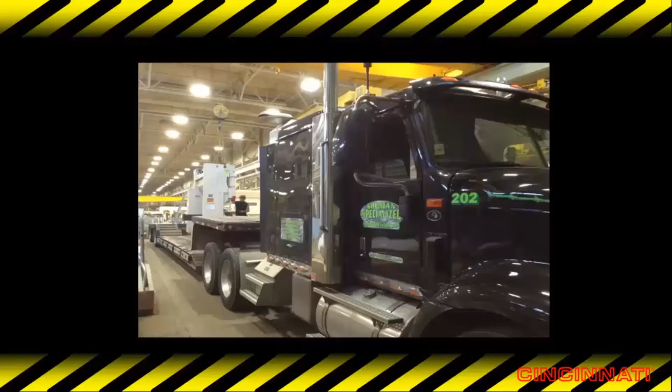To look at just one segment, restaurant and food processing equipment, we can see grills, refrigerators, dishwashers, shelving, counters, range hoods, warmers, ovens, and fryers are everywhere.

A press brake operator should always be aware of the tremendous forces involved in press brake metalworking. Naturally, specific safety rules must be observed when using a machine which can bend metal with forces greater than the force required to crush a car. Permanently disabling injury can occur when a press brake operator does not pay close attention to the job he or she is doing.

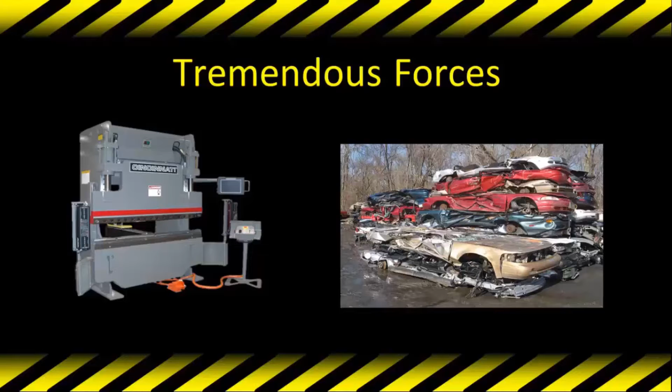Whenever you combine a human with a machine, safety becomes an issue, especially where you have large forces like are used to form or punch metal with a press brake. Applicable standards and safety codes. American National Standards Institute, ANSI, a private nonprofit organization that oversees the development of voluntary consensus standards for products.

ANSI B11.3 Safety Requirements for the Construction, Care, and Use of Power Press Brakes is a voluntary standard that provides safety guidelines for manufacturers of press brakes, employers, owners, and users. OSHA is a federal agency that enforces safety in the workplace.

OSHA requires employers to safeguard the point of operation per Subpart O, Section 1910.212 of the Occupational Safety and Health Administrative Directive. OSHA often references ANSI B11.3 for guidance.

Responsibility. Press brakes manufactured by Cincinnati Incorporated comply with the construction standards established by the American National Standards Institute and the Occupational Safety and Health Administration as of the date of manufacture. User responsibility. The user, that is the owner, is responsible for the installation and startup of the press brake.

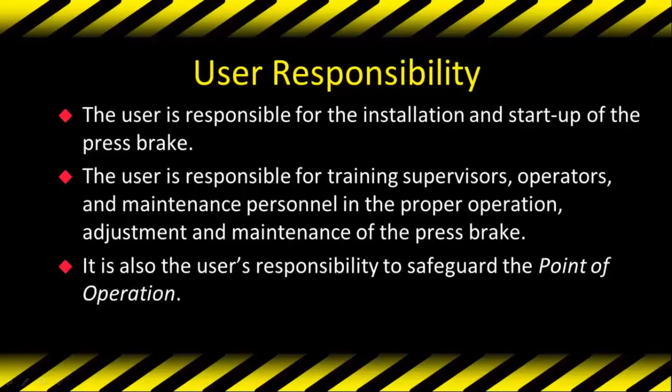Safety and warning signs indicate caution and should be read carefully. The signs may be attached directly to your machine or may be in the general work area. Obey these safety signs. Also check to make sure that the safety signs are in good condition. If a sign becomes damaged or illegible, please contact Cincinnati Incorporated for a replacement.

A sign on the machine indicates dangers involved and how important it is to read the operation, maintenance, and safety manual before operating the press brake. Do not place your hands in the die area. Do not position any part of your body where it can be struck or crushed by part movement. Always read and understand the operation, maintenance, and safety manual before installing dies, operating, or servicing a press brake.

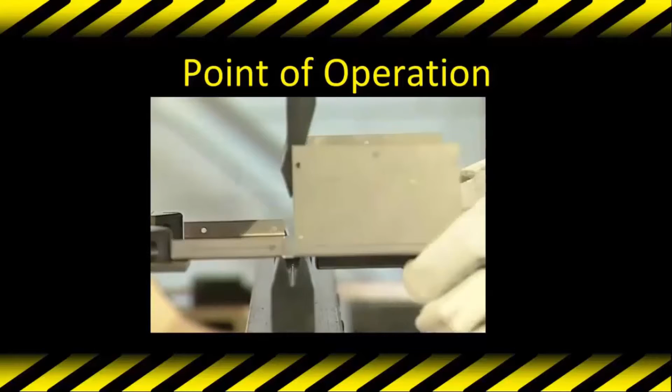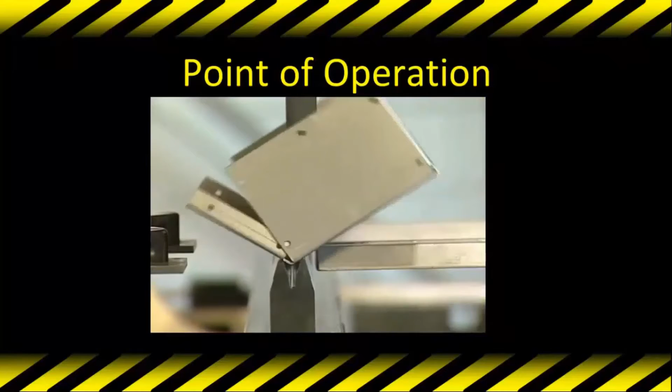The point of operation is the area between the dies where the actual forming occurs. Hands, arms, or other parts of one's body should never be placed in the point of operation. The most important press brake safety rule is never put your hands or other parts of your body between the dies, even when the press brake is stopped.

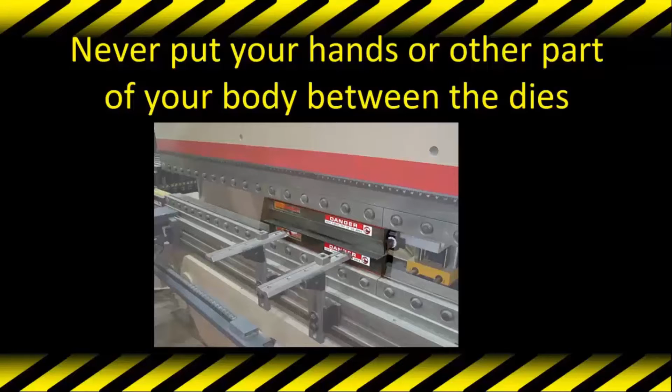Whip up is another danger most often presented when forming a large part. Smaller V-dies mean that even with a slow ram movement, the part can whip up very rapidly. Stand clear in the direction of the part movement. Select a safe forming speed. Fast forming speed that works productively on a small part may provide a significant whip-up danger on a large part.

Keep thumbs and fingers clear of part movement. Note that the faster forming speed in the first video produces significant whip-up. The second part is formed with slower forming speed.

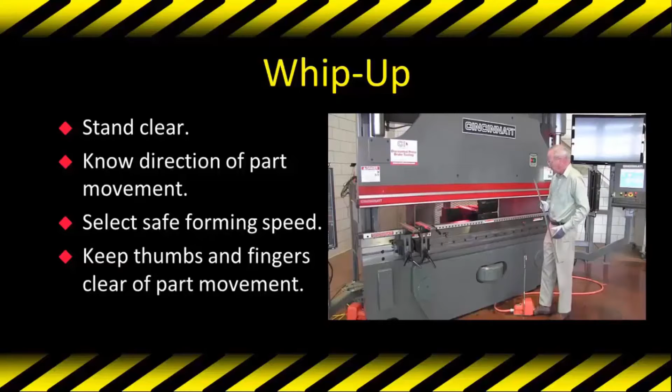The primary pinch point of the tooling is obvious. Secondary pinch points are not as obvious and provide a challenge to safely operating a press brake. The operator needs to be vigilant of part movement when it is formed. For instance, this part contacts the tooling at the end of the forming stroke.

If the operator is holding the part by the top of the flange, the hand could be pinched between the part and the tooling, resulting in serious injury. Always be aware of the direction the material will move when being formed. Then handle your material where your hands will not be in danger.

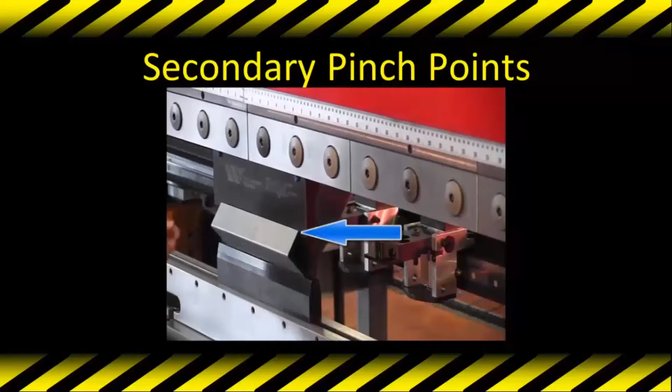Read operation and safety manuals. There are several manuals that come with each press brake. An operation and safety and maintenance manual should be kept at the machine for ready reference by the operator. Information on safeguarding and safe operation are also included.

Read the operating and safety manuals for the press brake you are using. These are available and should be in a pouch attached to the machine or nearby so that you can refer to them easily. If not, ask your supervisor. It may seem obvious, but managers and machine operators should review each publication supplied with the brake thoroughly before any setup or operation is attempted.

In addition, the safety guidelines reiterate reading and understanding the operation and safety manual. If there is some aspect of the brake that you do not understand, please feel free to contact Cincinnati. We have a team of training, tech support, and applications people available to answer your questions.

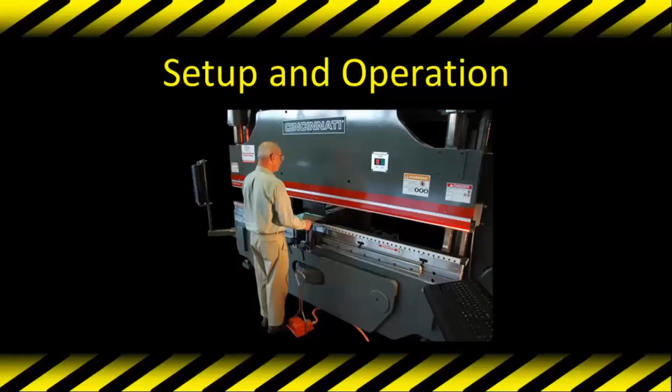Gain a full understanding of what the operator control key switches do and how to use them properly. The operator key switch is used to prevent unintended ram or gauge motion. Both operators and maintenance personnel should utilize the key switch when setting up or maintaining the machine. The key switch should be turned off, especially when making gauge adjustments or anytime someone is working behind the machine.

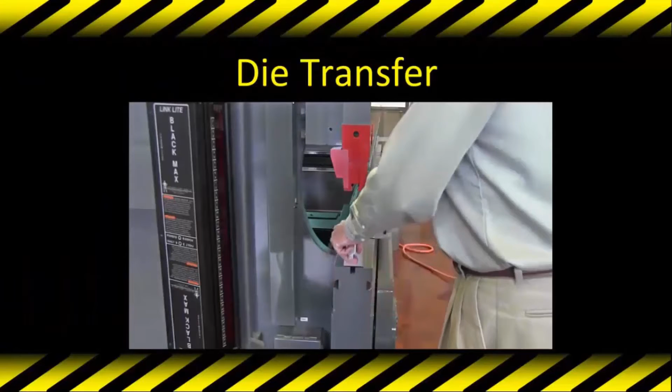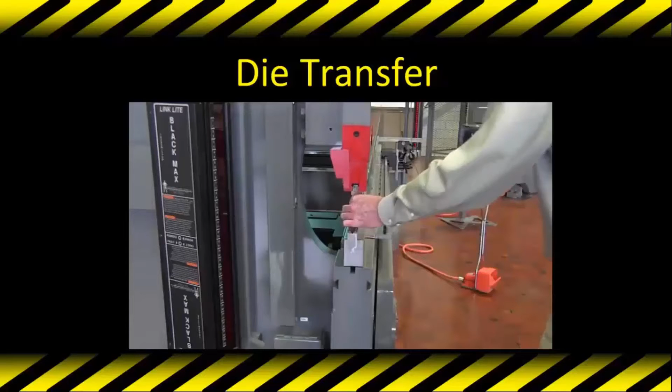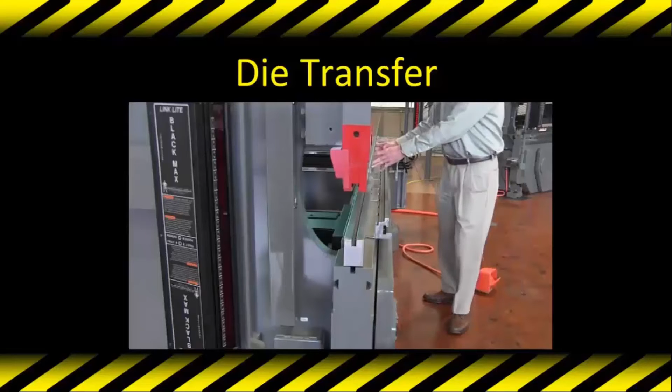Press brake setup, die selection. The first step in setting up a press brake is selection of the best dies for the particular job. Often a bend can be made by more than one set of dies, but in terms of safety and efficiency, there is always one set best suited for the job. When transferring dies to or from a press brake, know the weight of the dies. Don't assume that just because a die is small, you can carry it by hand. If you do not know the weight of the dies, or if the dies are heavy, use a hoist or other material handling device.

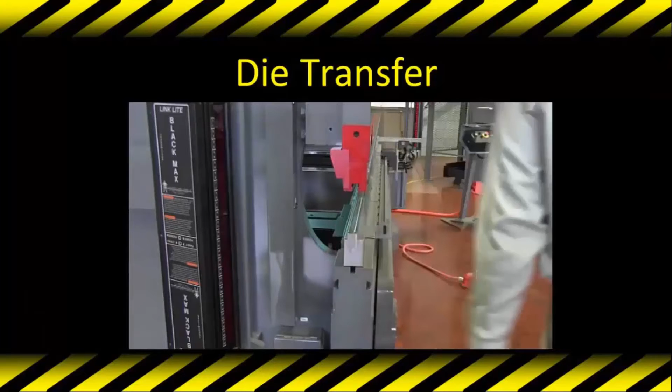The operator control key switch should be turned off to make sure the ram does not move any time tooling is being inserted or removed. The lower die should be installed first. The ram needs to be low enough to keep the upper die from falling out when it is slid in on the lower die. Under no circumstances should the operator put his hands between the dies.

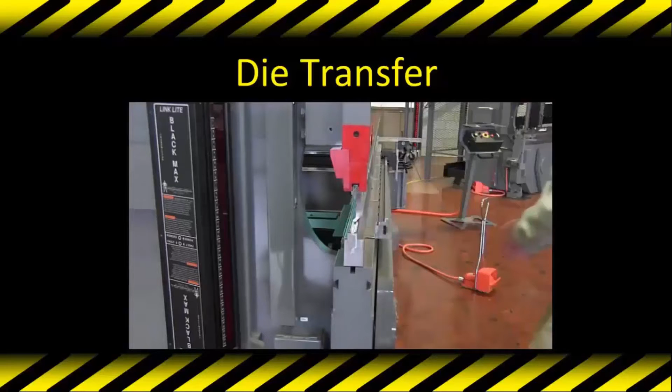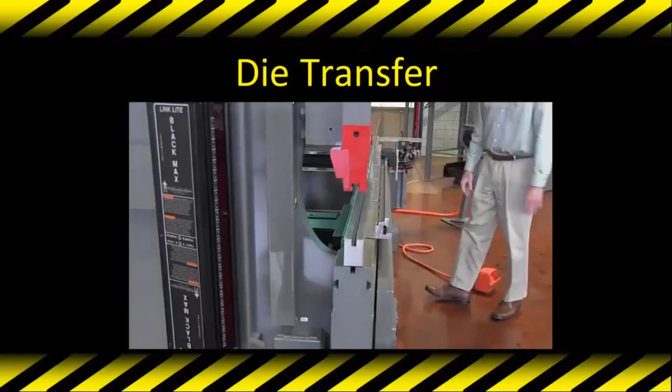When installing dies, use the palm buttons and move the ram down. Stop the ram just prior to bottoming on the lower die. Turn the operator key switch off. To remove dies, loosen the die clamps and slide the dies in or out of the ends of the press brake. When removing dies, make sure the upper die is resting on the lower die before the die clamp is loosened. For support, keep the tongue of the upper die in the nose of the ram. When moving dies, always remove the upper die first.

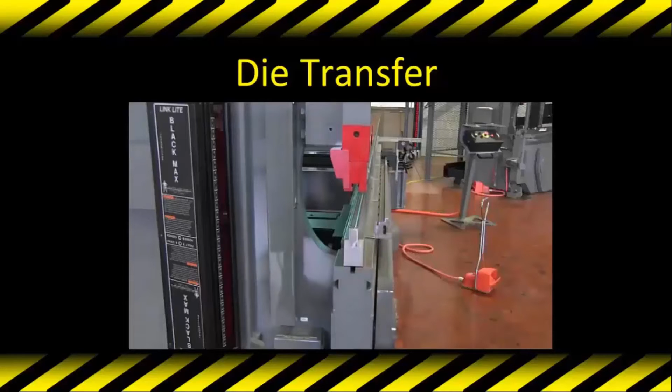On a mechanical press brake, it is recommended that the main motor be turned off and that you wait for the flywheel to stop before installing or removing dies. Next, make sure the operating control switch is off. This will prevent you or another worker from accidentally cycling the ram while setting up the dies. If a foot pedal is used to operate a press brake, make sure it is taken off the treadle bar. This is to prevent you or a coworker from accidentally activating the ram.

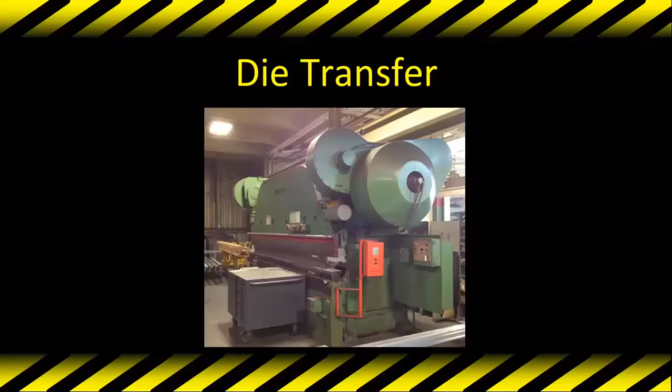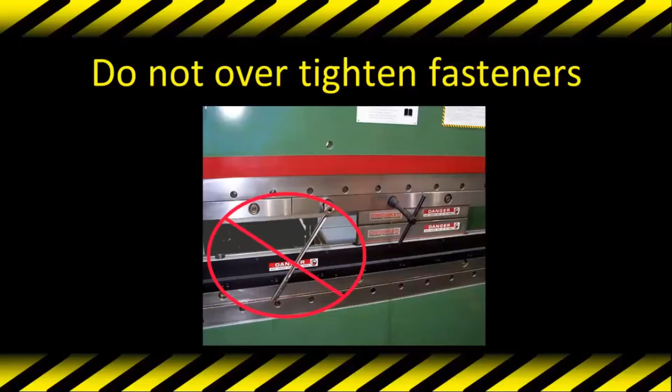Make sure all nuts, bolts, and screws are tight. Because of the forces involved, loose dies may be thrown out of the machine when it is activated, causing serious injury to you or a coworker. Do not over-tighten your fasteners. The T-wrenches that come with the machine are sufficient. Do not use breaker bars or longer wrenches.

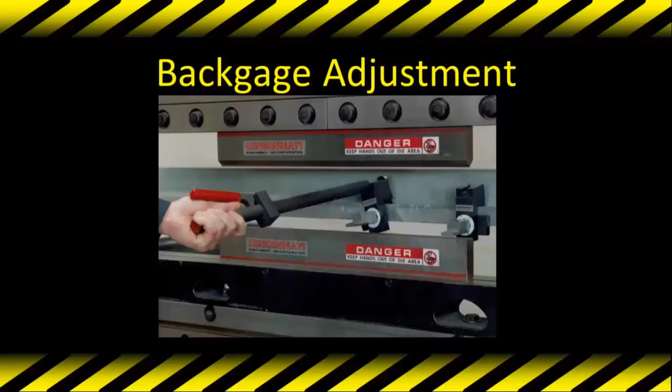Do not reach through the die space to adjust the back gauge. On some back gauges, special tools are available to adjust the back gauge without putting any part of your body in danger from either the point of operation or from the back gauge itself. Reaching through the die space is not only hazardous because of the point of operation, it is also dangerous because of back gauge positioning near the tooling. The back gauge can exert large forces that can cause severe injury between the gauge fingers and the tooling.

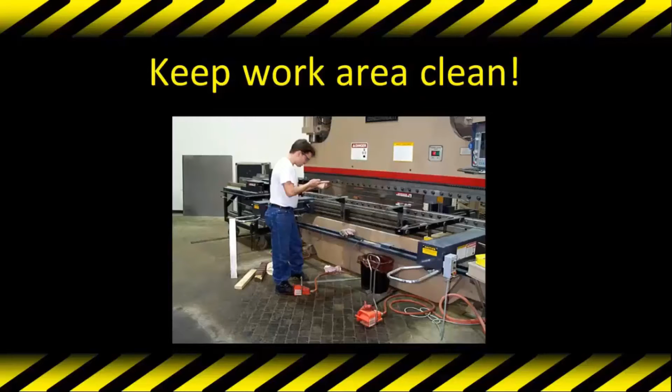Neatness is important. Keep the floor of your work area clear of scrap and trash that could cause you to stumble. Put scrap in the proper containers and keep stock and finished work neatly arranged. Be sure slippery surfaces are cleaned up properly. Stumbling and slipping can result in injuries as well.

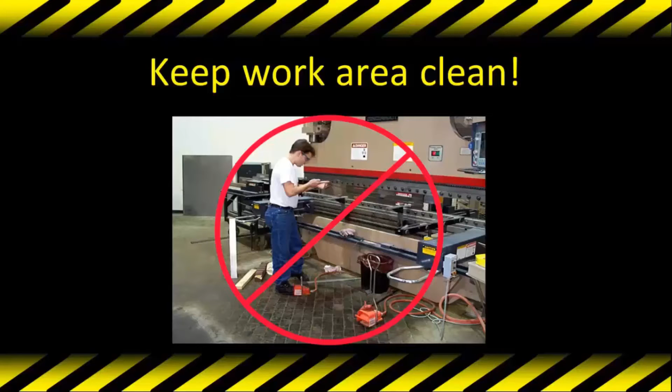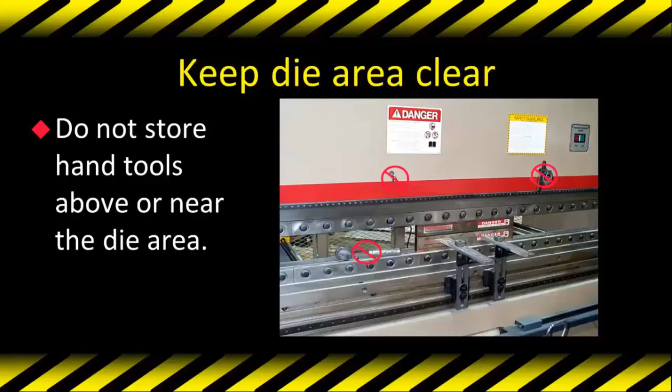Keep the die area clear. Put away all tools and equipment that are not in use. Tools left in the path of the dies may be shattered by the force of the press brake. Pieces hurled from the machine can cause severe injury and damage. When not in use, tools should be stored in a toolbox or on a wall rack. Hand tools should never be hung on the ram. Even a screwdriver can be deadly if left on the press brake or lower die.

Safeguarding. It is the user's responsibility to safeguard the point of operation of a press brake. The press brake manufacturer cannot determine all the possible uses of the machine tool they have produced. The user must, therefore, apply the proper type of safeguarding for the jobs that are being performed on the press brake.

Safeguarding selection process. Analyze the part before setup. Type and thickness of metal. Angle and radius of your bends. Length and location of flanges. Select the right dies for the job.

Is another type of machine better suited to perform this operation? Select the proper press brake. Examine tonnage, stroke, back gauge, and will it accommodate the part? We want to check the weight of the part to make sure that it can be safely handled. Can the material be safely handled?

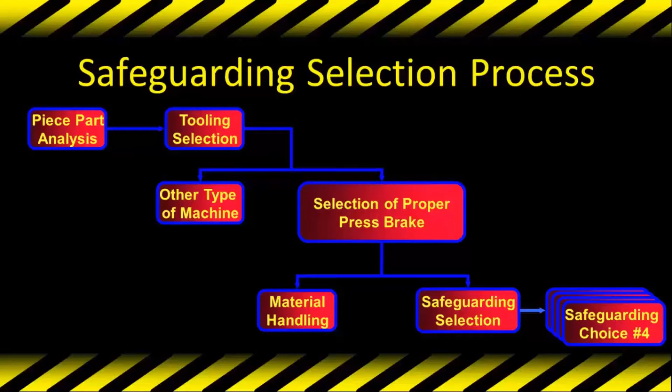We want to check the part for secondary pinch point conditions. What is the best safeguarding to use for the part using the selected tooling, handling, and forming sequence? There is no universal form of safeguarding that will work for all parts on all press brakes.

Point of operation safeguarding can be one or a combination of devices, guards, and methods including presence sensing, dual palm buttons, hand-foot sequence, restraints or pullbacks, safe distance, partial barriers, fixed guards, and safe opening.

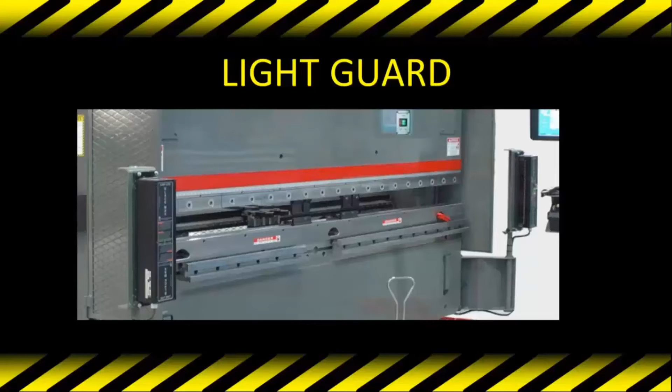Presence sensing devices. A light guard is a common presence sensing device that is used to safeguard the point of operation of a press brake. The light curtain spans the front of the point of operation and prevents press brake movement when the light curtain is interrupted.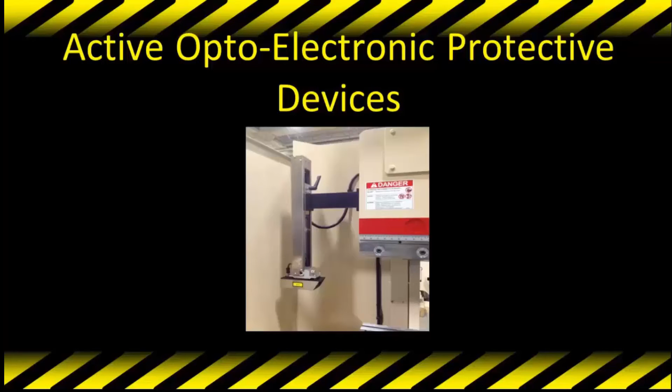Another form of safeguarding is active optoelectronic protective devices, sometimes referred to as a laser guard. They provide a protection zone just below, behind, and in front of the tip of the upper die. Dual palm buttons assure that both hands are away from the point of operation.

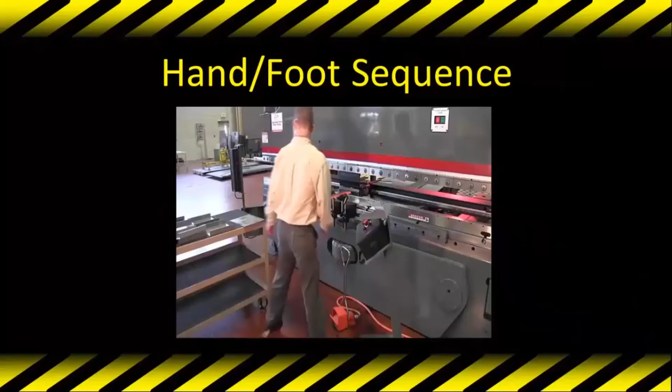The hand-foot sequence. Often, an operator can use palm buttons and a foot switch to provide safeguarding. The operator brings the ram down to a safe height with the palm buttons, then positions the part against the back gauge and cycles the machine using the foot switch.

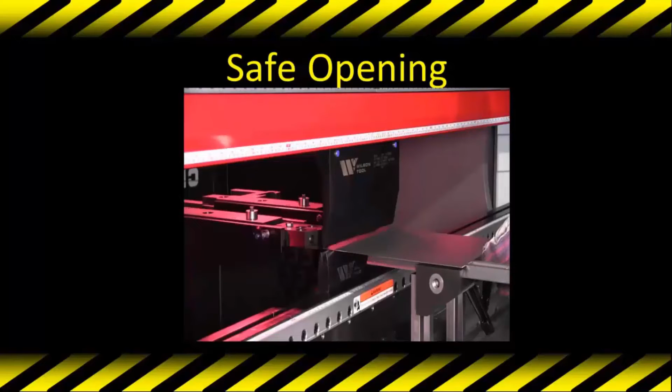Safe opening. Limiting the opening in the point of operation to no more than 1/4 of an inch or 6 millimeters may provide adequate safeguarding.

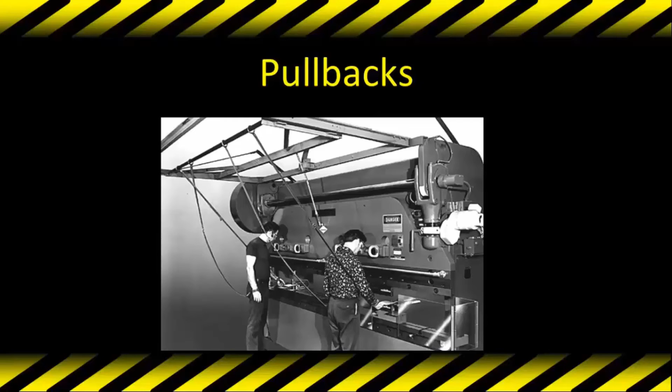Pullbacks are one of the original safety devices employed on brakes. They physically pull the operator's hands out of the way of the point of operation when the press brake cycles. These are more common on mechanical press brakes. Similar to pullbacks are restraints. They simply limit the motion of the operator to make sure they cannot reach the point of operation of the machine.

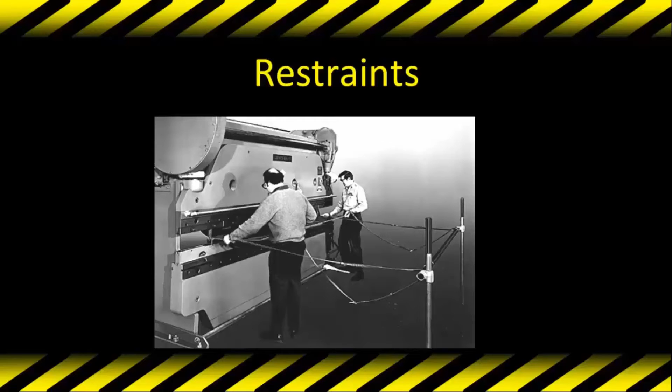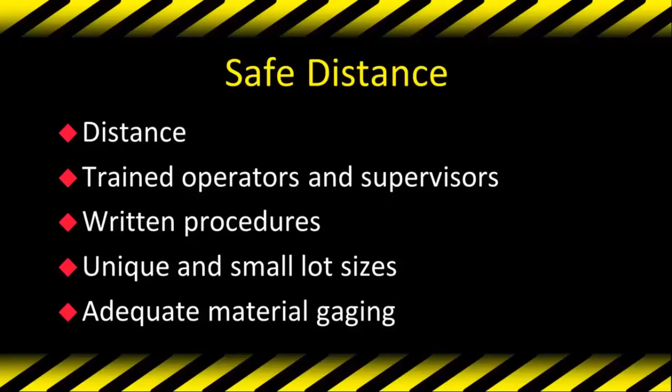Safe distance is a safeguarding method that involves participation of the supervisor, trained operators, and special instructions. This method is only used when safeguards and safety devices are not feasible. A safe distance from point of operation is determined by trained operators and supervisors. This method should only be used after thorough understanding of ANSI and OSHA requirements for safe distance safeguarding.

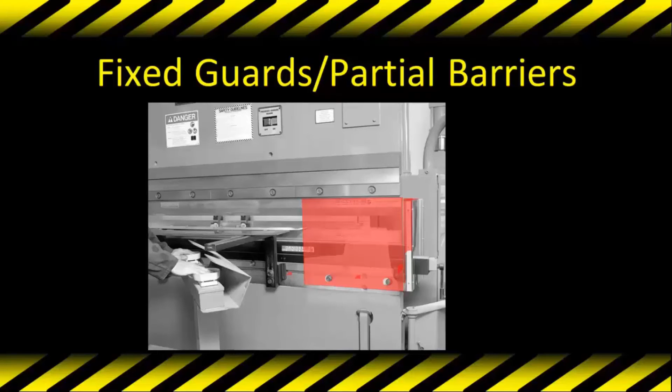Fixed guards and partial barriers. Unused portions of the tooling can be safeguarded when there are areas of the tool where the material is not being formed and the gap may be large enough to cause harm. End guards can be used to supplement other devices to limit access to the ends of the die space. End guards can be fixed or hinged. They may or may not be interlocked with the machine control.

Awareness barriers provide indication of areas where injury can occur. Make sure to follow proper procedures if you need to access the area guarded with an awareness barrier. Some press brakes have a fence and an interlock gate to prevent entry into the rear of the machine.

Safety devices, guards, and methods are no substitute for proper operator safety training by management, following recommended machine builder safety practices, good machine maintenance and repair programs, or most importantly, a safety-minded employee.

It is important the user specify protective gear that must be worn at all times when in their shop. Safety glasses and safety shoes should always be worn in a fab shop. Wear snug-fitting hand and arm protection when handling rough or sharp-edged stock.

While the machine itself can pose dangers, the simple handling of material in a fab shop poses its own set of dangers. Sheet metal can have sharp edges. Metal parts can be awkward to handle. Recently cut plate parts can be hot. Parts can be heavy.

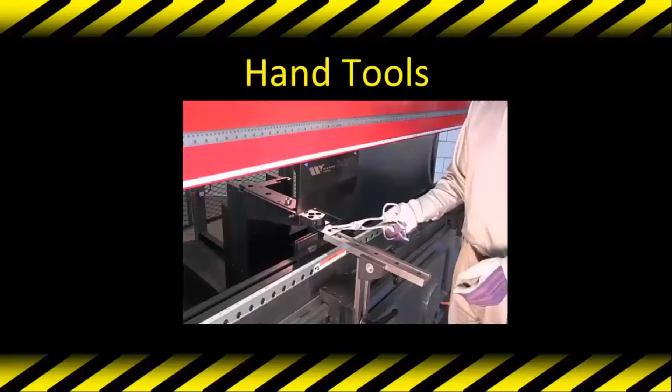Another way to keep hands away from the point of operation when placing and removing small parts is to employ hand tools like these aluminum tongs. Only soft tools should be used near the die area to help prevent the possibility of injury should a hand tool be left in the die area.

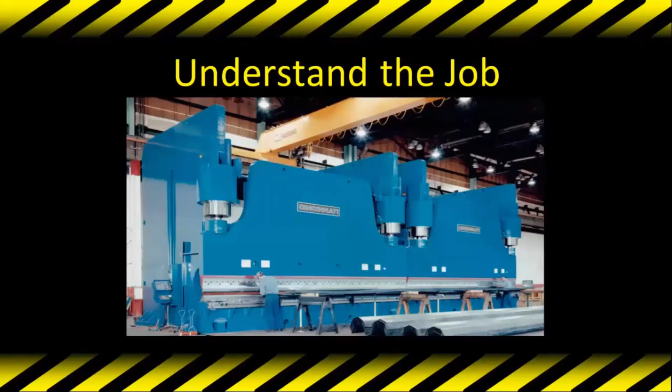Understand the job. If you are working with another person, be sure you both understand the job to be done. Go over the job step by step so each of you understands what the other is doing.

Note that these two operators are forming a larger part. The part cannot be formed until they both activate their respective foot controls, or palm buttons, if that's the case. This assures that both operators are ready to form the part safely. More importantly, either operator can stop the motion of the press brake simply by releasing the foot switch.

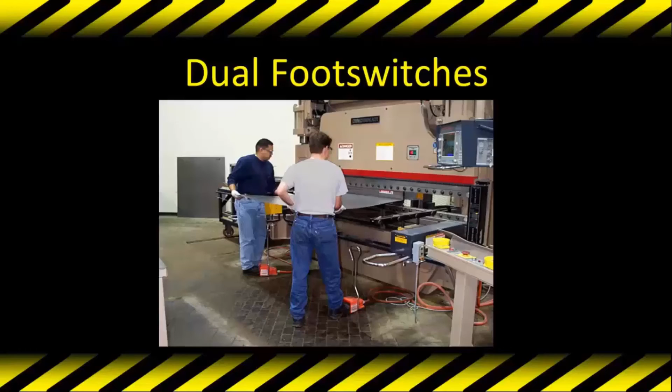Use a maintenance checklist to be sure the press brake is in proper working condition at the beginning of each shift. Safeguarding at the point of operation is in proper adjustment and operating properly. Pinch point guarding is properly installed. Operator controls are functioning properly. Operating modes are working okay. Ram starting and stopping properly, especially on an older style mechanical press brake.

Warning plates should be clean and easily read. Electrical wiring in good condition. Caution painting in good condition. Auxiliary equipment like cranes, scissors tables are checked or working properly. Hand tools are in good order and readily available. Personal protective equipment, make sure yours is in good shape and you and the people around you are wearing appropriate equipment for the job.

Concerning your manuals, the operation, safety, and maintenance manuals are attached to the machine and you are familiar with their contents. And that scheduled normal maintenance work has been completed. Only then should you start to do work on the machine.

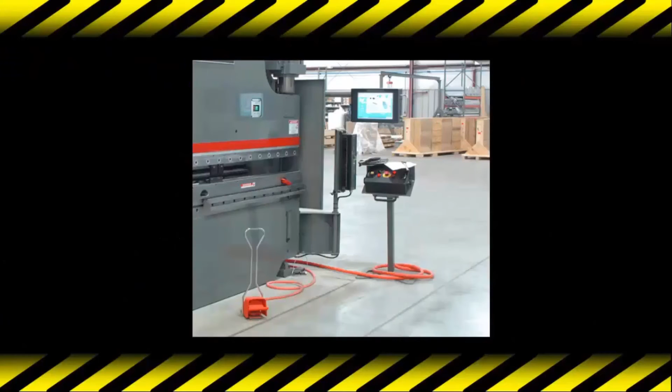The controls and wiring should be checked to be sure they are not damaged. Damaged wires or electrical boxes may short out a safety device or operator control, preventing it from working properly. All safety devices on the press brake should be checked to be sure they are operating correctly. Report to your supervisor any needed repair or safety hazard that you are not authorized to fix yourself. Do not operate the machine until it is repaired.

Before each use of the press brake, a thorough check of the neatness and maintenance of the press brake is important to ensure your safety and the safety of your co-workers. Use a maintenance checklist to be sure the press brake is in proper working condition at the beginning of each shift.

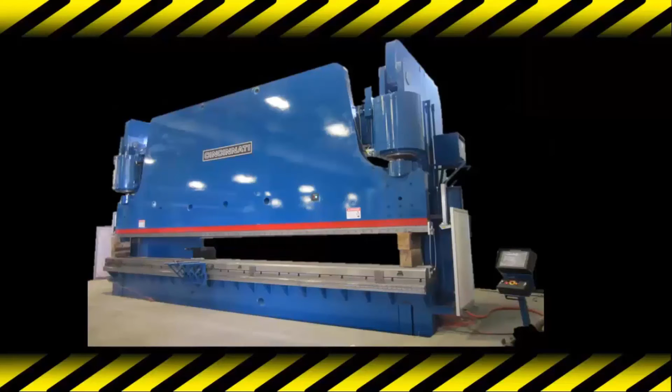Review of press brake operation. When operating or helping on a press brake, you must pay close attention to the job you are doing. Talking, joking, lack of attention, or leaning on machinery while the press brake is in operation can result in serious injury to you or other employees. You should know how your particular press brake operates and understand the specific job you are doing and its safety requirements. If you have any questions regarding safe operation of your press brake, ask your supervisor.

At the beginning of each shift, or after you've been away from the press brake for a while, run the machine through several strokes without any material in it to make sure everything is operating correctly. Use special safety hooks or small hand tools to insert and remove parts. These safety tools will crush rather than shatter if accidentally caught in the point of operation. Never place your hands in the die area to reposition or reach for a falling part. No part is worth your hands.

Know which way the piece will bend. If the piece moves upward and you are not careful, you could get hit in the face or your hands could get pinched between the piece and the ram. If the piece, while being bent, moves downward and you are not careful to keep a safe distance, you could get hit in the stomach, knees, or other part of your body.

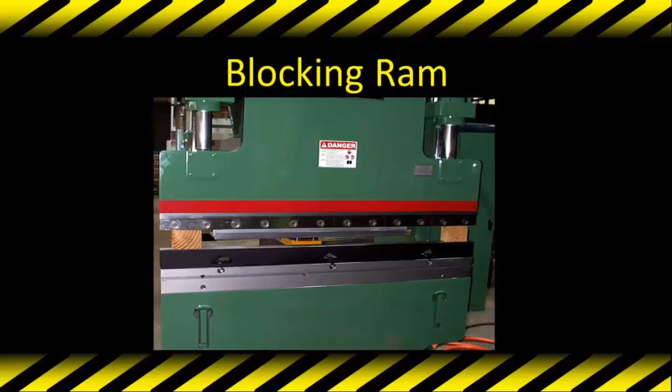Blocking the ram. When you leave your hydraulic press brake, make sure the ram is safe and that it cannot drift out of position. An out-of-level ram from a leaky valve can result in the need for a service call. To make sure the ram is safe, it needs to either be at the bottom of the stroke or resting on appropriate blocks or resting on appropriate tooling.

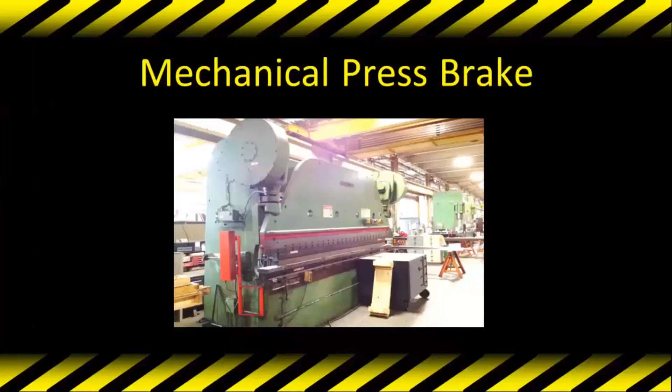Whenever you leave a mechanical press brake, it is best to leave the ram at the bottom of the stroke. Before leaving, turn off the control, set the locking pin, or remove the foot pedal so no one can accidentally activate the machine. If the ram does not stop immediately when the controls are released, turn off the machine and report this to your supervisor. A brake adjustment is needed if the ram coasts to a stop after the controls are released.

This program has reviewed some of the important safety precautions regarding press brake operation. Other precautions may also be needed, depending on the particular job and the press brake being used. Cooperation with fellow workers is an important aspect of press brake safety. Safety is a team effort. This is especially true when more than one person is operating the press brake.

The press brakes you operate use powerful forces to bend or punch metal. Your safety and the safety of your co-workers depend upon the use of proper safeguarding and safety awareness discussed in this program. Keep safety in mind at all times when operating a press brake. Experience involves learning by your mistakes. Education is learning how not to make the mistakes experienced by others.